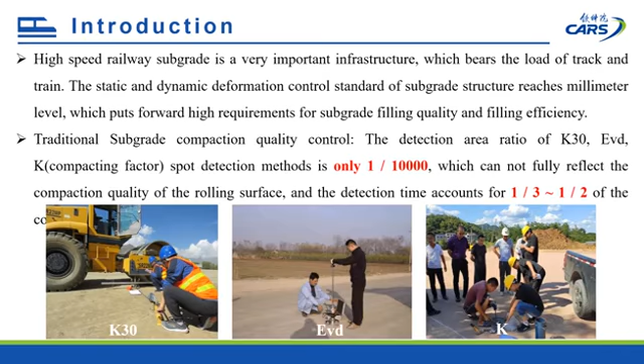Therefore, Thurner analyzed the distortion degree of the acceleration signal of the vibrating wheel in 1980, which can express the soil stiffness to a certain extent. He proposed to use the ratio of the second harmonic amplitude to the first harmonic as the index to evaluate the soil stiffness, and defined this index as the compaction meter value, or CMV.

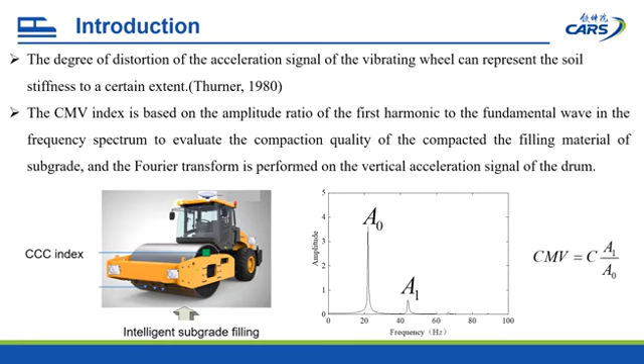China high-speed railway subgrade is mainly filled with coarse-grained soil. The particle size gradation, filling thickness, and subgrade structure are significantly different from highways and dams. Besides, the components of vibration response spectrum of coarse-grained soil are complex, and the detection accuracy and reliability of existing continuous detection indexes are low. Therefore, in view of coarse-grained soil filler of high-speed railway in China, it is necessary to develop a new continuous compaction evaluation method to ensure the construction of high-quality railway subgrade.

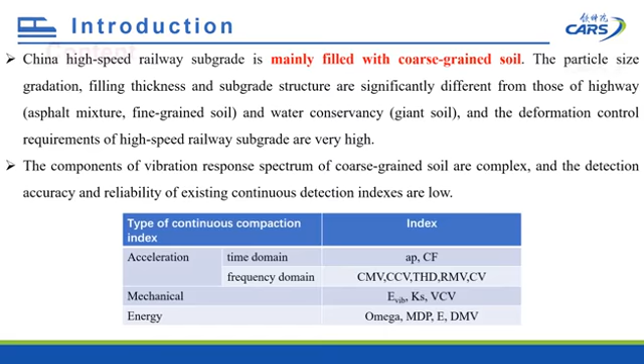The second part is to introduce the continuous compaction control index, compaction energy value, referred to as the CEV. The compaction energy generated by the vibration of the drum propagates to the filling material of subgrade in the form of waves. Part of the energy is absorbed by the filling material of subgrade, and the other part is returned to the drum.

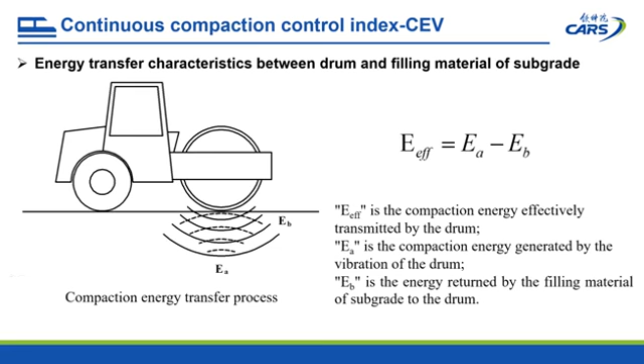How to calculate the CEV index? In order to quantify the amount of energy carried by the nonlinear vibration signal, the acceleration signal of the drum is decomposed by the EMD. The energy distribution is displayed in the form of a marginal spectrum in each frequency band of the vibration signal. The physical meaning of the marginal spectrum is the total energy of the instantaneous frequency in the signal. It can be used as a continuous compaction control indicator to determine the degree of compaction of the filling material of subgrade, which uses the principle of integration to sum the marginal spectrum curves to obtain the total energy carried by the vibration signal.

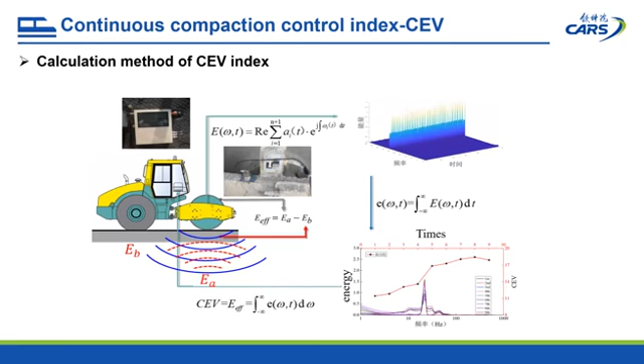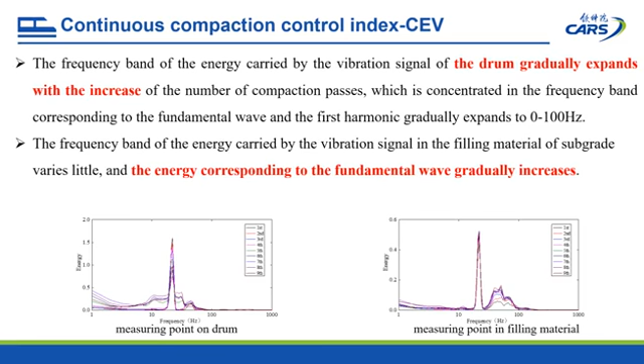The frequency band of the energy carried by the vibration signal of the drum gradually expands with the increase of the number of compaction passes, from being concentrated in the frequency band corresponding to the fundamental wave and the first harmonic, gradually expanding to 0 to 100 Hz. The frequency band of the energy carried by the vibration signal in the filling material of subgrade varies little, and the energy corresponding to the fundamental wave gradually increases.

Moreover, the energy changes corresponding to the fundamental wave are different, and the total energy of the drum and the filling material of subgrade is gradually increasing and becomes stable after the filling material of subgrade enters a relatively stable and dense state. It reflects the effectiveness of energy detection in the compaction process by CEV.

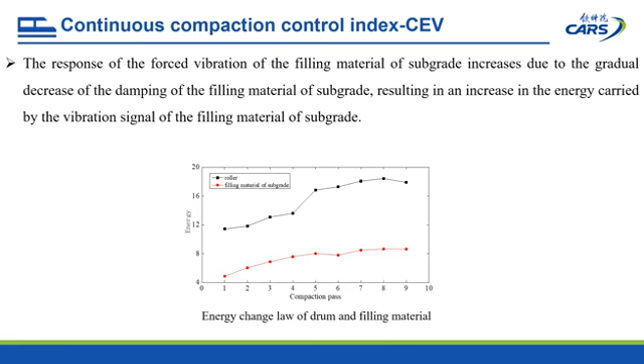The third part is the field test. The verification of the continuous compaction index is carried out by establishing the correlation between it and the conventional detection method, and the correlation coefficient meets the requirements of relevant specifications. The index has a strong correlation with EVD, which can be used to reflect the continuous compaction process of the subgrade. The correlation coefficients of CEV and CMV index are 0.87 and 0.61, which meet the requirements of the Swedish compaction specification.

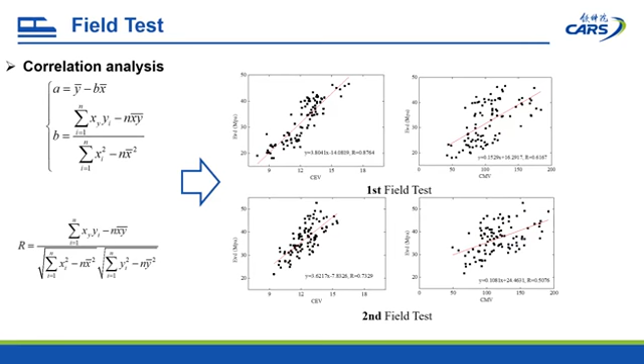What's more, the CEV correlation coefficients with K, K30, and EVD are 14 to 25% higher than those of CMV, and the accuracy of continuous detection of compaction quality of coarse-grained soil filler for high-speed railway subgrade is greatly improved, as shown in the figure.

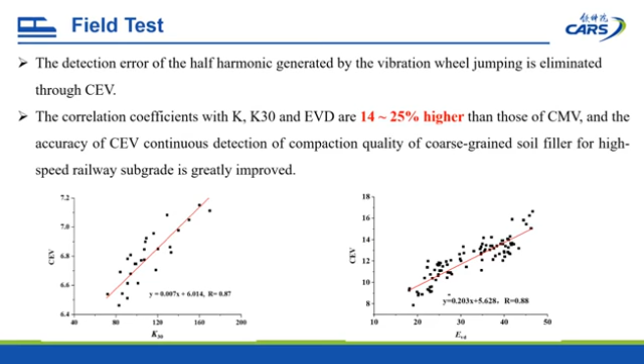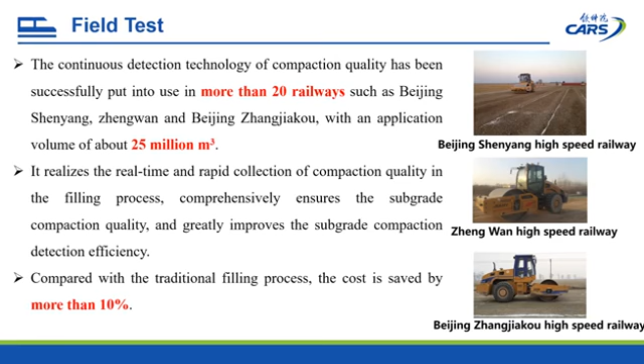Besides, the continuous detection technology of compaction quality has been successfully applied to more than 20 lines, such as Beijing to Shenyang, Zhengzhou to Wanzhou, and Beijing to Zhangjiakou, with an application volume of about 25 million cubic meters. Compared with the traditional filling process, the cost is saved by more than 10%, and the social and economic benefits are remarkable.

The last part is the conclusions. Through the above research analysis, we have drawn the following conclusions. The continuous compaction control index, or CEV, of high-speed railway subgrade, based on vibration signal energy, analyzes the characteristics of energy changes during the compaction process according to the law of conservation of energy.

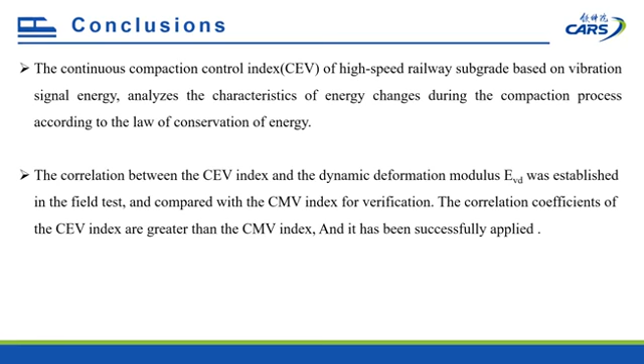The change characteristics of the energy carried by the vibration signal of the drum are used to reflect the energy exchange during the entire compaction process, and the energy is quantified in the form of the marginal spectrum of the vibration signal. The correlation between the CEV index and the dynamic deformation modulus EVD was established in the field test and compared with the CMV index for verification. The correlation coefficients of the CEV index are greater than the CMV index, and it has been successfully applied.